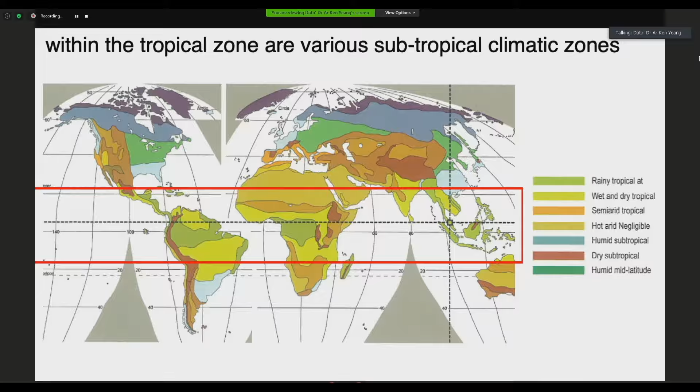Now the key design factors, these are some of them. There are many books written on this. The best are written by the Olgyay brothers, Victor and Aladar, in the early 60s, Baruch Givoni, and also in the mid 60s by Koenigsberger and people like that.

But these are some of the key factors. When you design in the tropics, you have to be very aware of the climatic data. You have to find out what is the acceptable level of comfort, because that varies from country to country and from culture to culture. Some people can tolerate a higher level of heat than others, while other people become very sensitive.

Then the orientation of the building is important, because if we look at the sun path, that determines the orientation of the building. What you want is to have minimum facades of your building facing the hot sides of the solar path.

And then the building configuration is important, the shape of the building. And then the solar insolation, how do you keep that away, the thermal control and glare. And then use of wind—the use of wind and natural ventilation can contribute towards reducing the use of energy.

And also the facade design. Of course, facade design includes aspects such as sun shading, the type of glass you use, and type of insulation. For instance, low-E glass is very effective, but expensive.

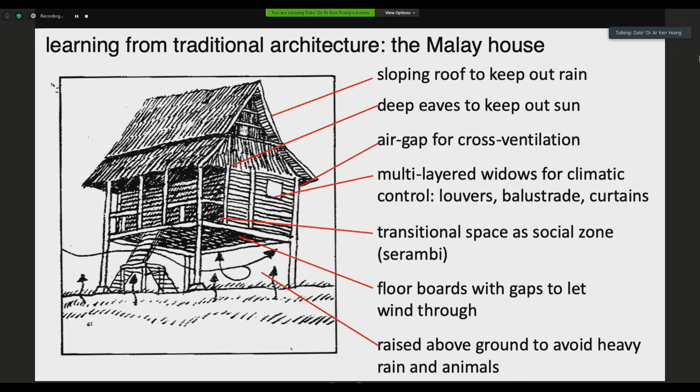So what we need to do is to study our traditional architecture, find out what is it in it that we can reinterpret in contemporary times. And this is why tradition and culture is very important, to go back and study it. This is just an example of analysis of the traditional Malay house, and there are other house types that we can analyze.

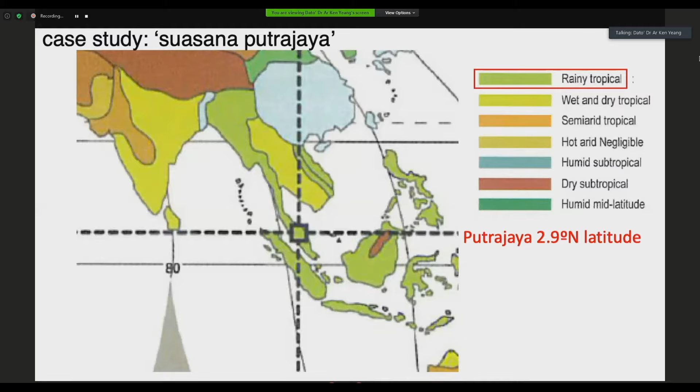Now, as a case study, I want to show a project that we designed in Putrajaya. It's called the Suasana Putrajaya. The first thing we do when we design, since we work all over the world, is to find out what latitude we're working in, because that gives an indication of the vegetation and the climate. So Putrajaya is about 2.9 degrees north of the equator, which indicates a tropical climate.

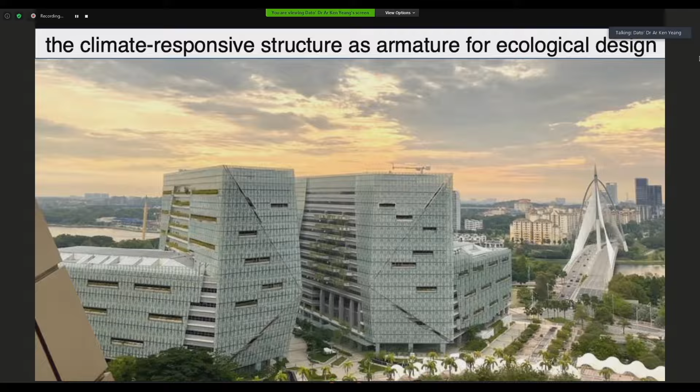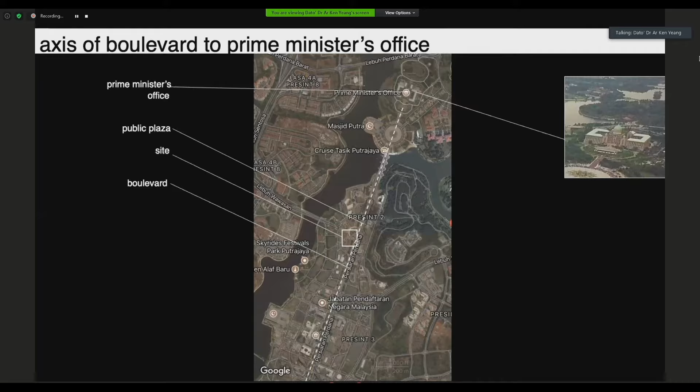Now, designing with climate gives us a climate-responsive structure, which is an ideal armature for ecological architecture. This is a project we finished about two years ago. It's by the bridge, along the boulevard, all the way to the Prime Minister's office. You can see the building there on the white square by the bridge, and then along the boulevard to the Prime Minister's office.

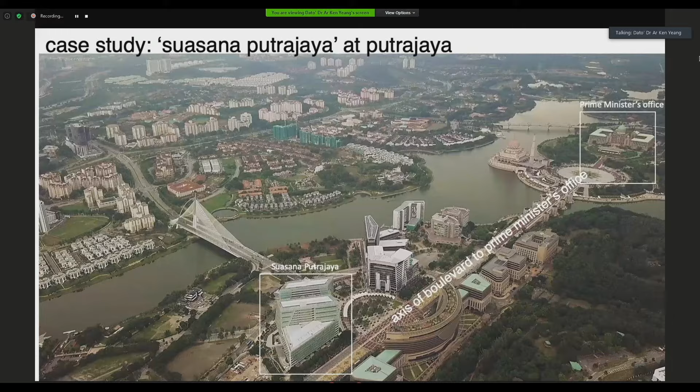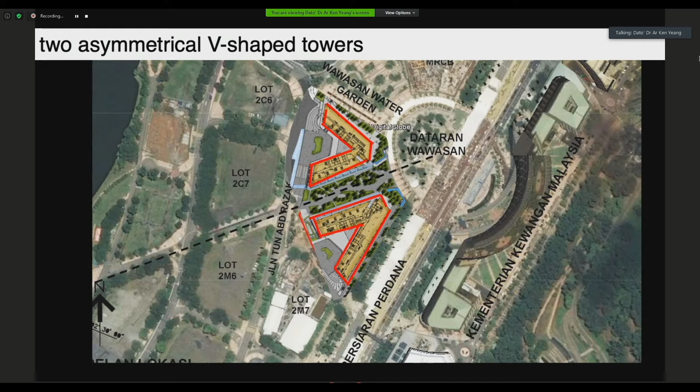It is two asymmetrical V-shaped towers, with the public realm in between, aligned with the Dataran Wawasan, and the axis goes all the way down to the Millennium Monument. This is the axis from the Dataran down to the Millennium Monument, which is also designed by us. And that's the bridge, with the Putrajaya offices on the right-hand side.

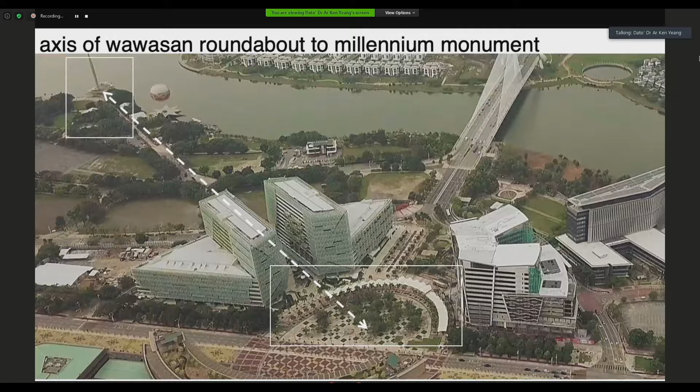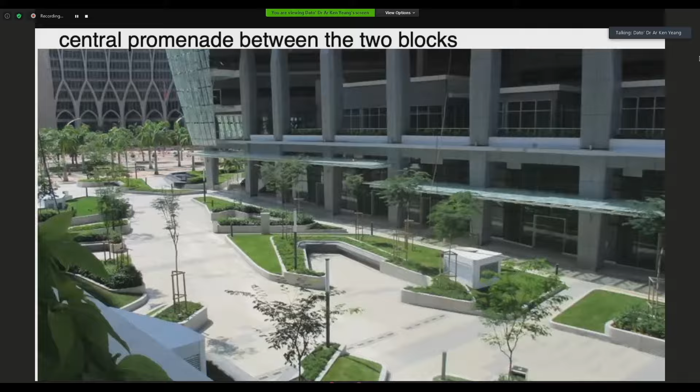The two V-shaped towers form the public realm, a place where people can sit, eat and drink. On the ground floor, facing this public realm, there are restaurants and cafes, so people can create a buzz around this locality. This axis shows the Dataran all the way down to the Millennium Monument at the end, which is right next to the Ministry of Finance and other buildings in that vicinity.

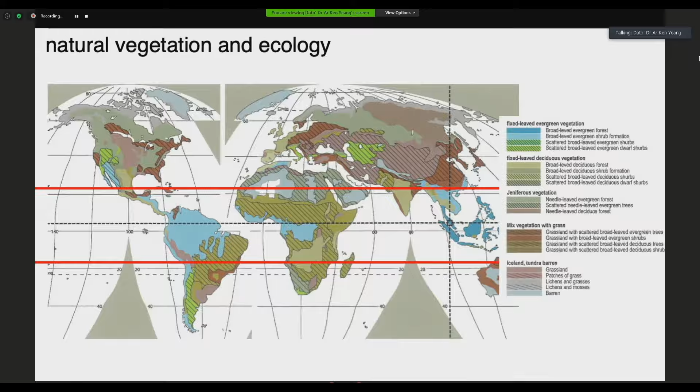Now, we've talked a lot about the climate and the tropics, but you cannot design for the tropics without looking at the ecology and natural vegetation. This is the different natural vegetation within the tropical zone, and this is clearly the biodiversity diagram for a certain species of butterflies. You find that near the equator is the highest level of biodiversity, so we have to be very careful when we design in this locality. The further up in latitude, we don't have to be as concerned, although there are some areas which are extremely biodiverse and sensitive. But particularly in the tropics, we have to be very, very vigilant about what we do on the land.

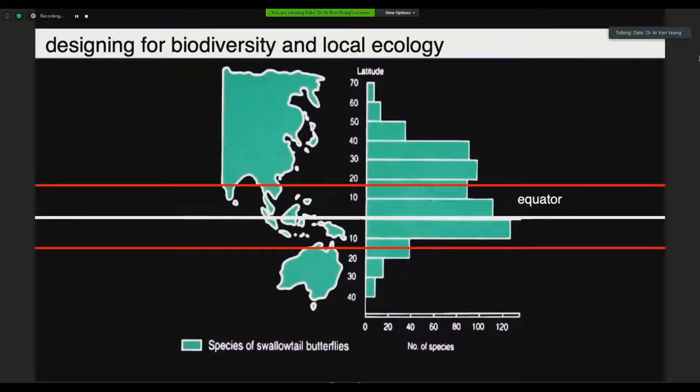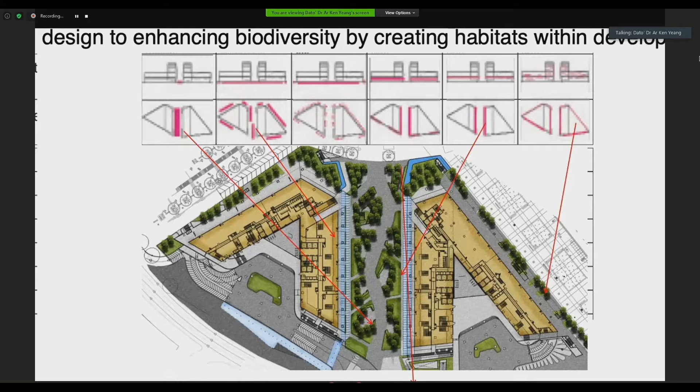Now, when we design, the first thing we do is create habitats within the development. This is a unique way of development - very few architects do this. A lot of architects put vegetation into buildings, but they don't know why they do it. Sometimes the vegetation they use is actually invasive species, which isn't good for the locality. What we try to do is create habitats on the ground, habitats in the air, habitats on the roof, habitats within the buildings - this is the first thing we do. And then we create what we call a biodiversity matrix, where we have the habitats on one axis.

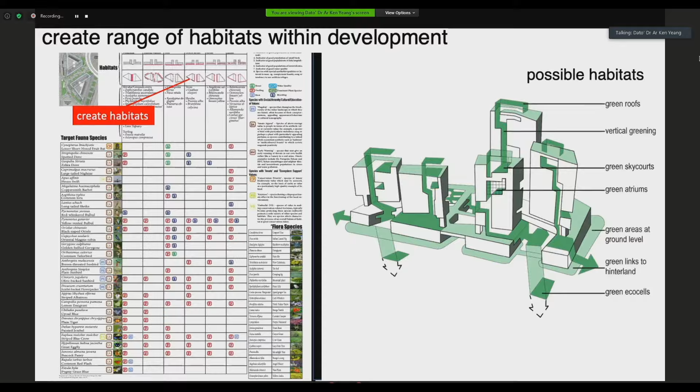On the other axis, we look at the species we want to bring back into the locality, which have been removed when they excavate the land, because by the time we got to the site, the land has been cleared. All we have is just the red soil. So we try to choose the species or habitats that will attract the fauna and flora we want to bring back into the site. I call this the biodiversity matrix approach.

From there, we choose the flora that will attract the fauna. We prepare the species, prepare the matrix, and see how they interact, how we can bring the fauna back for feeding, breeding, refuge from prey.

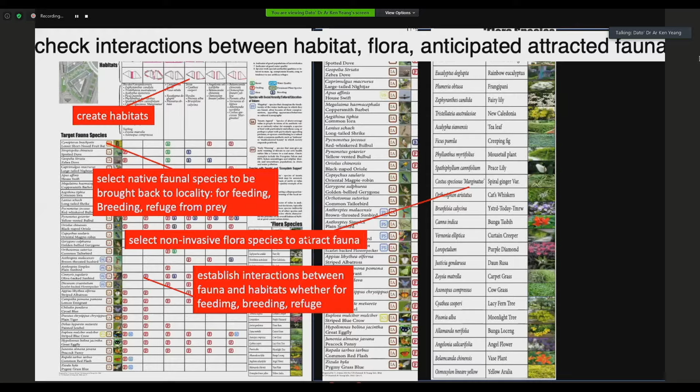Once we set this together, the next step is to design the landscape conditions within the site, so that the whole development becomes a total living system. We call this a biodiversity approach to design, a method we've developed to enhance the biodiversity of the location.

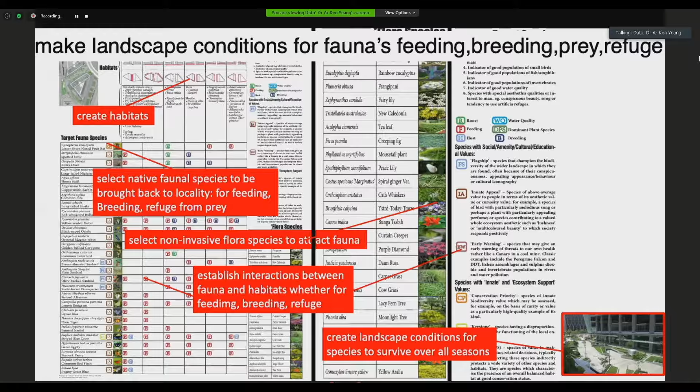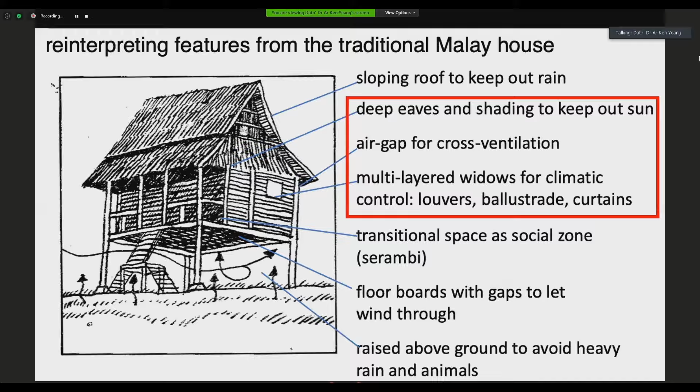Now, if you go back to the diagram I showed earlier, reinterpreting the features from a traditional Malay house: deep eaves and shading to keep out the sun, air gaps for cross ventilation, multi-layered windows for climatic control, louvers, balustrades. With this project, the traditional approach to keeping out the sun is horizontal louvers, but I thought there must be alternative ways besides using louvers.

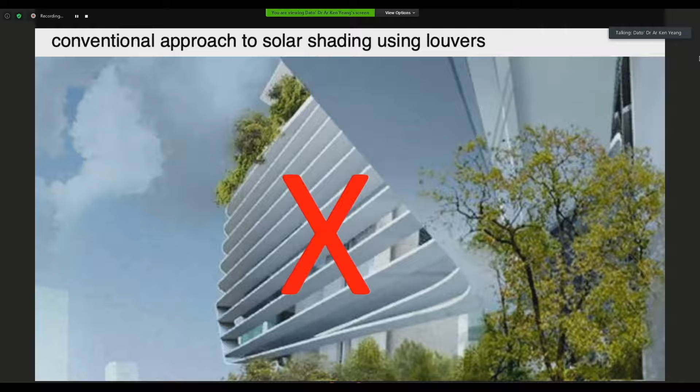So we thought maybe we should use fritted glass instead. With this project, we use glass fritted with a pattern on it. For cultural reasons, we took the Songket pattern, and with this pattern, 50% of the glass is fritted with white patterns to keep out the sun.

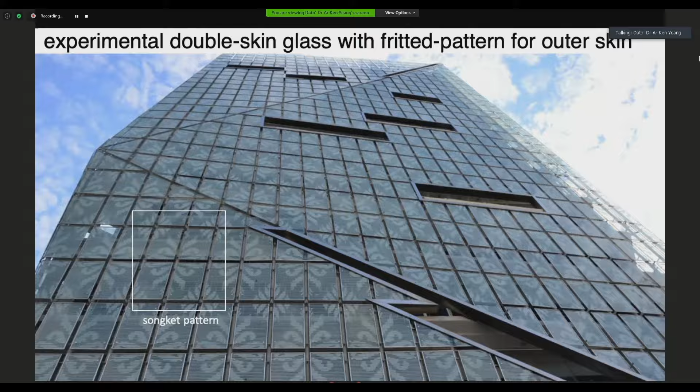Then I have air gaps between the glass panels so the wind can go through, and this is the outer skin. From there you have an air gap - you can see on the right-hand side it's like a walkway, with about a meter gap between the outer skin and inner skin.

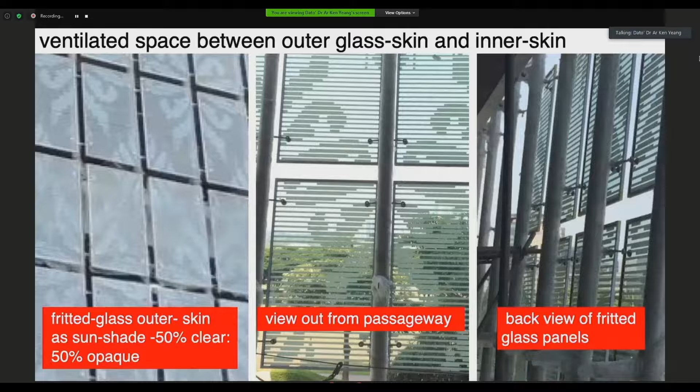On the left-hand side is the fritted glass outer skin, in which 50% is clear and 50% is opaque, and you can see the Songket pattern. The view out from the passageway from the inside shows the fritted glass pattern, and a walkway in the space between the inner skin and the outer skin.

We wanted to shape the building because this is an upmarket location, so we took the diamond as a metaphor for design, and the building's shape is faceted so that it looks like a jewel.

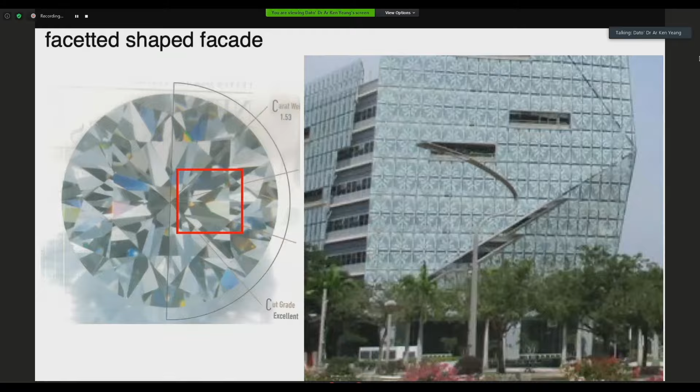Now we wanted to check how effective the fritted glass is. A typical office building, the baseline building in Malaysia, uses 210 kilowatt hours per square meter per annum. But by using the fritted glass, we got it down to 136.18 kilowatt hours per square meter per annum.

So the fritted glass actually works, and it's a novel way of keeping out the sun while giving the building its own shape and form, without affecting the regularity of the internal spaces. So this shows that it works.

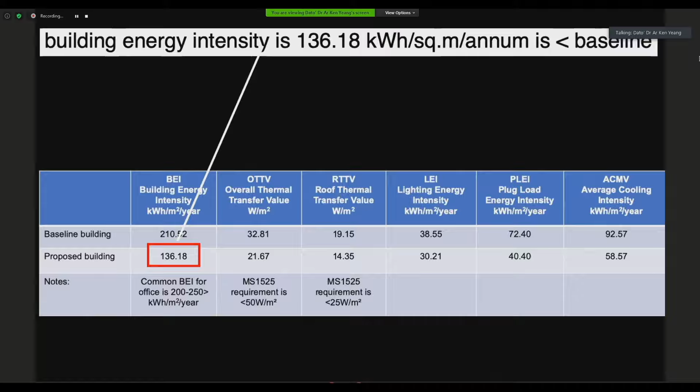Now, the solar path is very important. At the equator, especially in Putrajaya, which is about 2.9 to 3 degrees above the equator, the sun is almost east and west. The sun rises in the east, goes overhead, and sets in the west. A third of the day is in the east, a third is overhead, and a third is in the west. These are the areas where you need solar protection.

But compare this to the northern hemisphere, like Paris, which is 48 degrees north - the sun is very low, and on top of that they have seasons, so you have to let the sun in. It's a lot more complex to design in relation to climate in the temperate zone and cold zone than here in the tropics.

Obviously we only have more or less one consistent season throughout the year. But in Paris, London, or Europe, you have winter, spring, and autumn, and summer - two extreme seasons: a cold season like winter, a hot season like summer, and two very nice mid-seasons in spring and autumn.

But the approach to the facade is very different, because in cold climates you have to let the sun in during winter, because you want to get the warmth of the sun and as much sun as possible.

And the sun is very low. So the type of louvers you have has to allow for the sun to come in. But in the summer, you reverse it because it's hot. Then you have to keep out the sun. And so in the cold climate and temperate climate, you have facades which are operable.

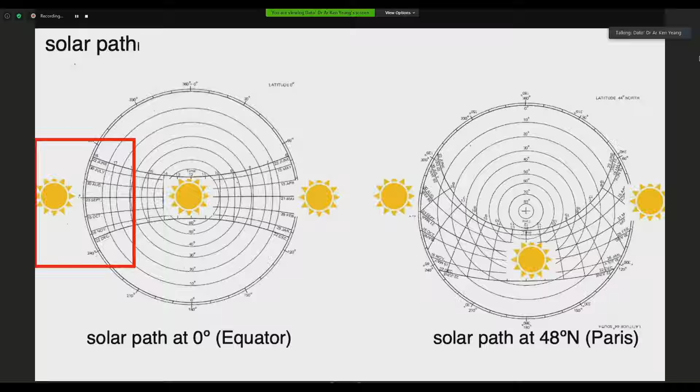And so for the western sun, for instance, for this particular project, we angled the glass. So you can see that the facade is changed on the western side. You can see in the red line on the left-hand side, western glass.

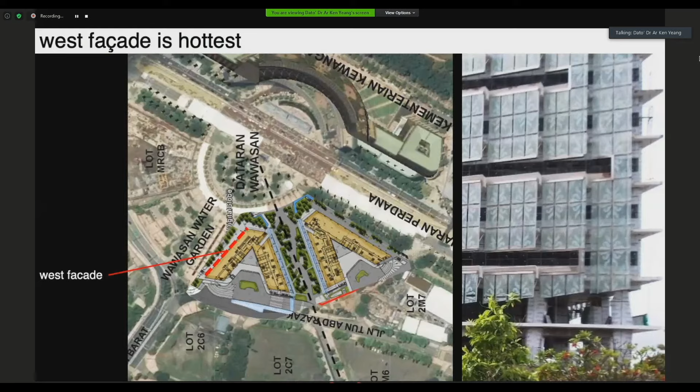And so this is the western facade, which is angled to keep out the sun from the insides of the building. And then these are different habitats that we have in the building.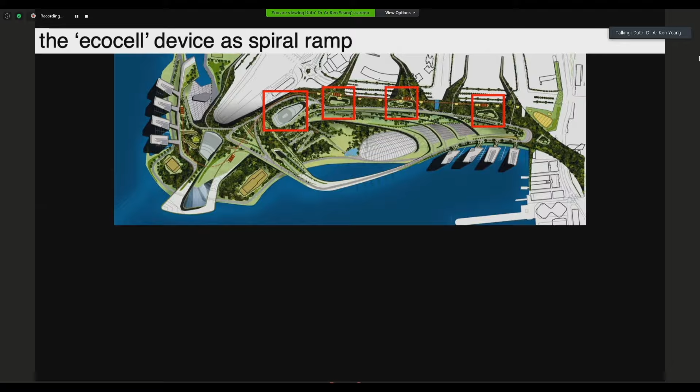And these are where the eco cells are. And this idea of the eco cell was developed when we worked on this project. It's basically a spiral ramp that brings the vegetation all the way down to the basement.

And so the eco cell does 5 things. It brings vertical integration of the vegetation, provides opportunity for rainwater harvesting to close the loop. It provides an opportunity for natural ventilation to the insides of the building.

It brings daylight into the insides of the building. And at the bottom is where we could have an ecological machine for treating the waste material, or we can have a biosphere. And so this is the eco cell device that we start to put into some of our buildings.

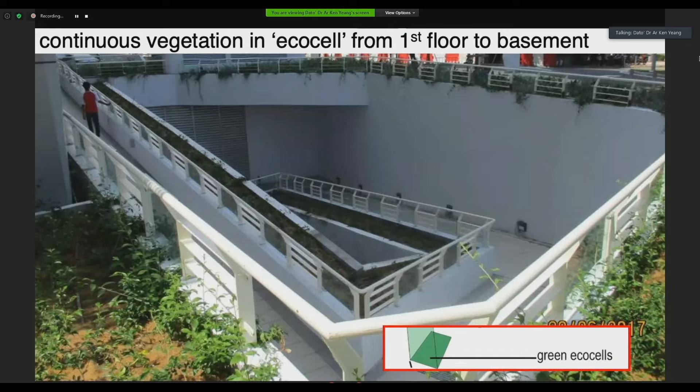And so for this building in Putrajaya, we have an eco cell, and this is the eco cell. The vegetation starts from the first floor, goes into this ramp, and you can see the planter on the left-hand side of the walkway that goes all the way down to the basement.

Now, it's easy to put habitats on a medium-rise and a low-rise building or low-rise development. So how do you create habitats in a high-rise built form? Because you don't have very much land area. The floor plate is small.

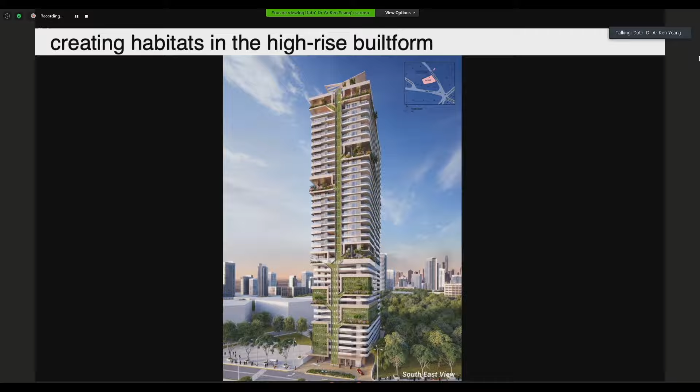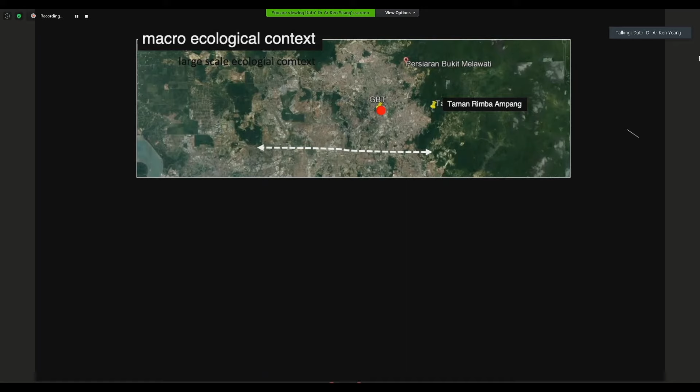And so what we do is that we create habitats on the facade of the building, and we stratify it. So that means we try and look into the ecology of the areas near the site. So the site's that red dot, and look at the species within this area, and look at the species near to our site. And from there, we try and prepare again a biodiversity matrix for this project.

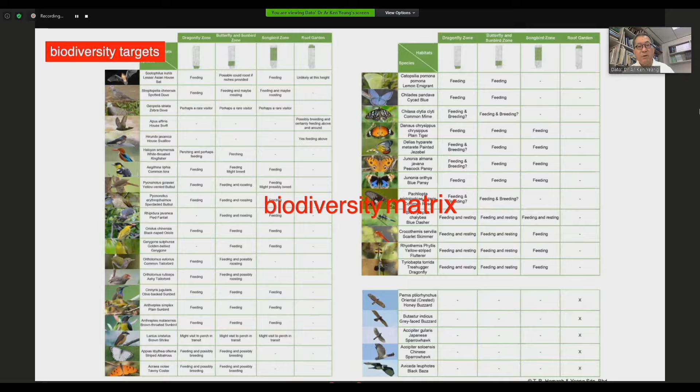The green areas are fairly close to each other, so like a stepping stone, the species can move from one to the other.

Because by doing this, you have a larger pool of resources in which a species can share. It enables species migration and movement within the vegetated areas.

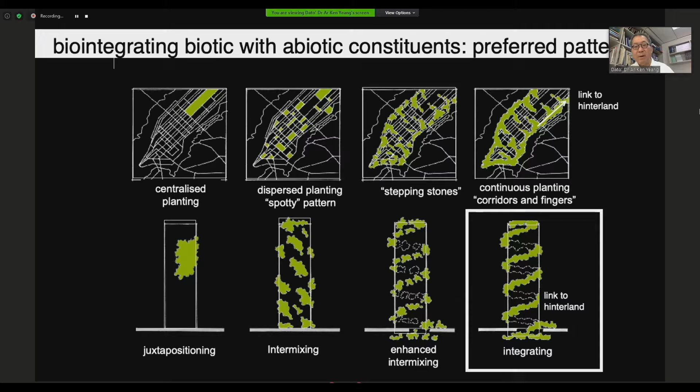And it also engenders a much more stable ecosystem habitat that can survive without human intervention. And so what we try to do then is to link the green areas in the ground.

Because what human beings do is that when we go to any land, we fragment it, we chop it up, like converting a cow into a burger.

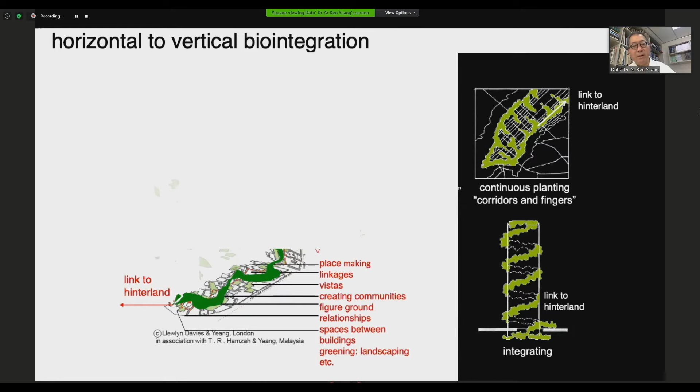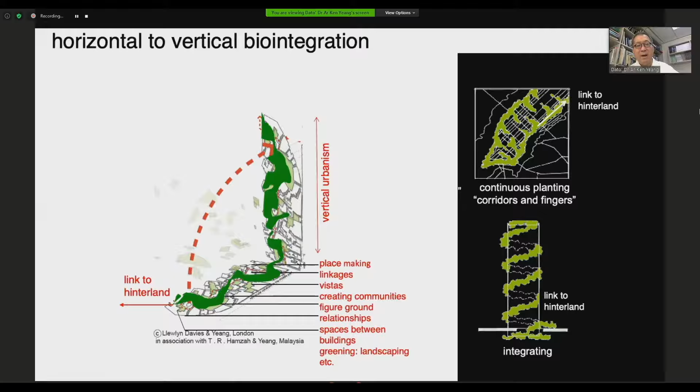And then we should try and link it. So if people ask me what we should do with cities, we should link all the green areas in the city so that we have greater connectivity and ecological nexus, but not just within the ground plane—we should try and connect it vertically as well. And so the whole city then becomes not just abiotic, not just inorganic, but linked as a continuous set—you should repair the fragmentation that human beings have done to the locality.

And so with this project, we stratified the habitats. We try to design the lower floors for dragonflies, choosing a species that will attract them. After that is the butterfly zone, attracting butterflies. In between, we have what you call the songbird zone. And the top one is for migratory birds. So this way we stratify the habitats vertically.

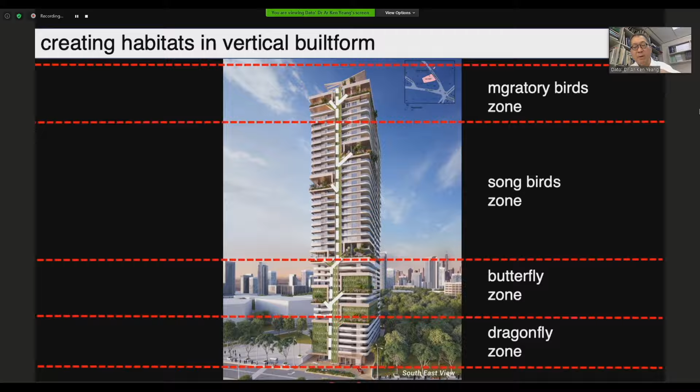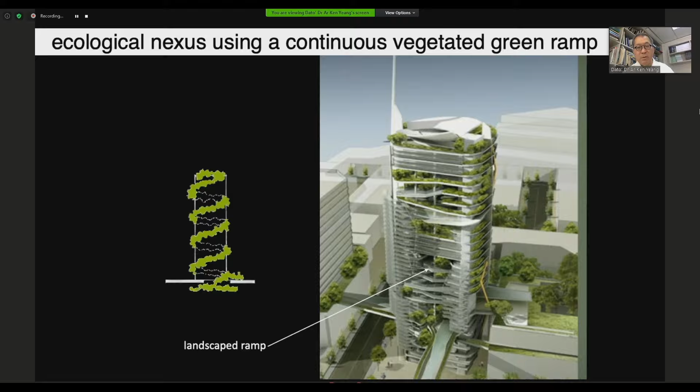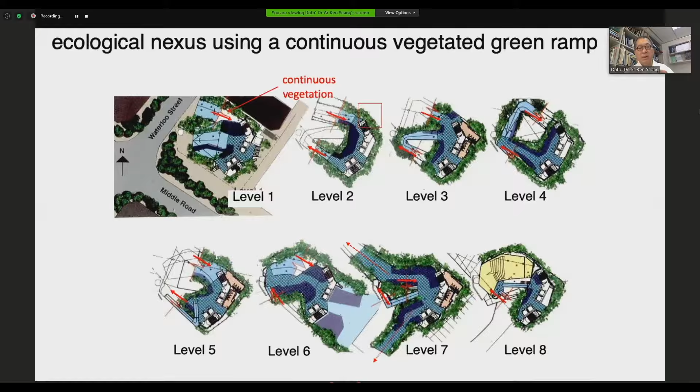With this project, which we designed in Singapore, the idea is to use continuous vegetation that goes all the way around the building as a vegetated ramp. So with this project, what we try to do is have a continuous ramp of vegetation that flows all the way up to the top of the building. And this way, as you can see in the diagram, you have continuous vegetation.

By doing this, you create a building which tries to balance the biotic with the abiotic constituents, to make it into a living system as much as possible. Of course, this is easier said than done, because half the time I'm fighting with clients, and clients say, 'Do you want to put veggies in your buildings? It's going to cost me a bit more money, I'm not getting any profit out of it.' So you have to tell clients that designing a green, sustainable building is not for commercial reasons—it's ethical, it's the right thing to do. So half the time I'm trying to persuade them to do it, and that's what we do all the time.

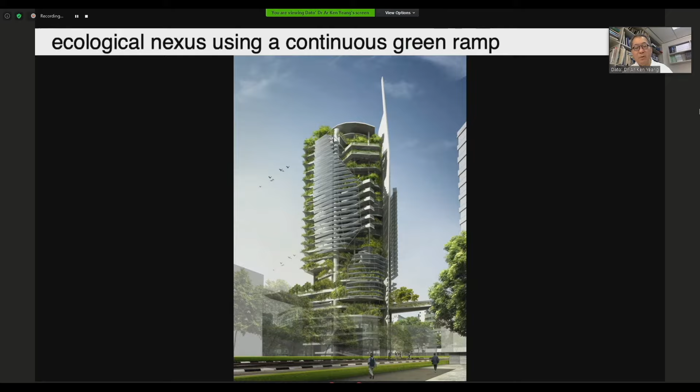But the whole idea of this building is that with continuous vegetation, whenever there is an adjoining building next to it, we could bridge across to the roofs of the next building. In this way we colonize the whole city. The whole city then becomes a vegetated city, a green city, covered with biotic constituents instead of just being inorganic, as most cities are at the moment.

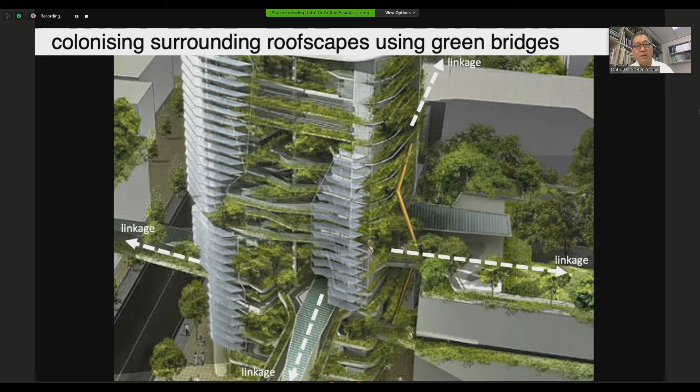Above this is the idea that in master plans you would have ecological corridors and ecological fingers that convert the city, balancing the abiotic, inorganic aspects of the city, and making it much more like an ecosystem. By bringing vegetation into the city, the more we put in, the more ecosystem services we bring back into the locality, which is good for the environment.

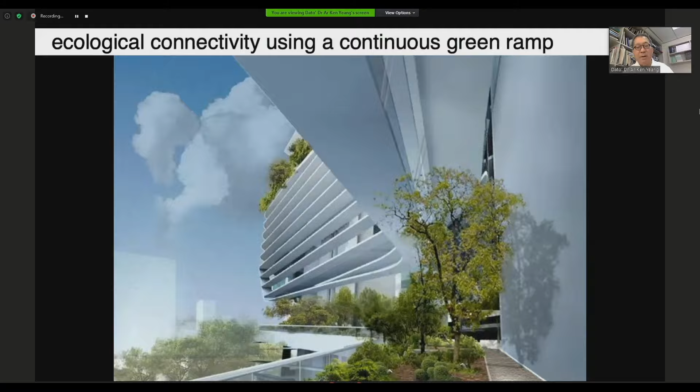And so this is the building where we had louvers on the outside, and you can see the vegetation in a spiraling ramp going all the way up. What we've done is put a walkway next to it, so people can service the plants without going through the interior office spaces of the building. Here it is being used—you can see the sun shading on top, the plants, and people actually using it.

Then we said, well, we might as well make this into a park, so we call this a linear park, where with every facade we climb one floor. Here it shows how it climbs. Here's the building in this context, and you can see the ramp vegetation going all the way up the facade.

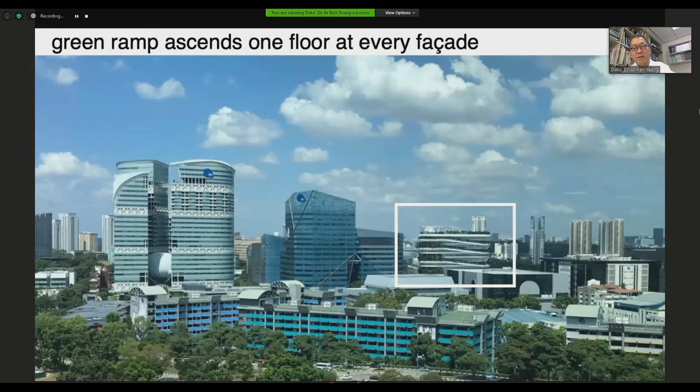With each floor, we cover one facade. You can see here a close-up of the ramp, the walkway, the vegetation, and the facade on the left-hand side—you can see the sun shading. And of course, the plants help cool the building.

It gives out a certain amount of oxygen, which creates a lower microclimate, making it cooler, and that's also a healthy environment for the locality. So the vegetation starts on the ground and climbs up the building right to the top.

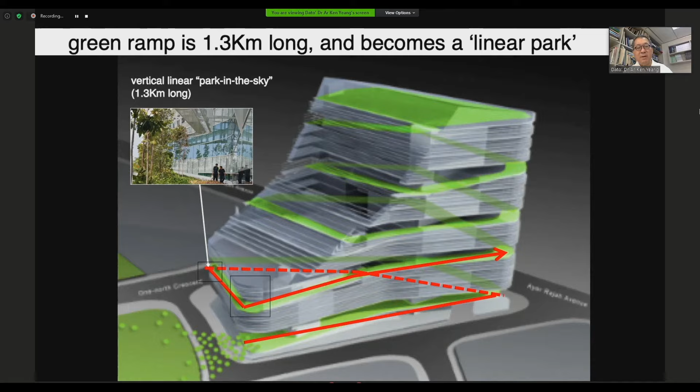If you stretch this vegetated ramp out, it's about 1.3 kilometers long. The green vegetation put in is 12 times more than what is required for certification for the Green Mark. So you can see we try to bring as much green as possible into the building for this project.

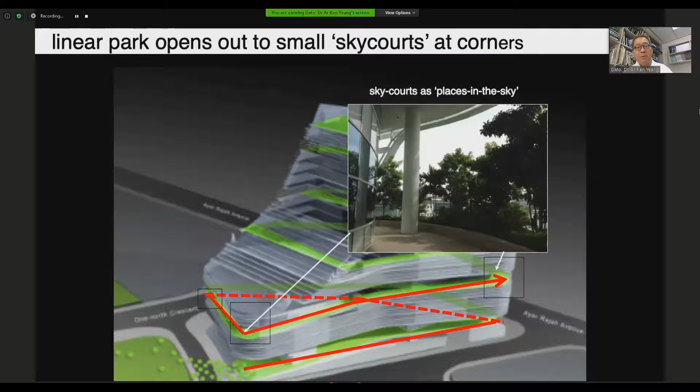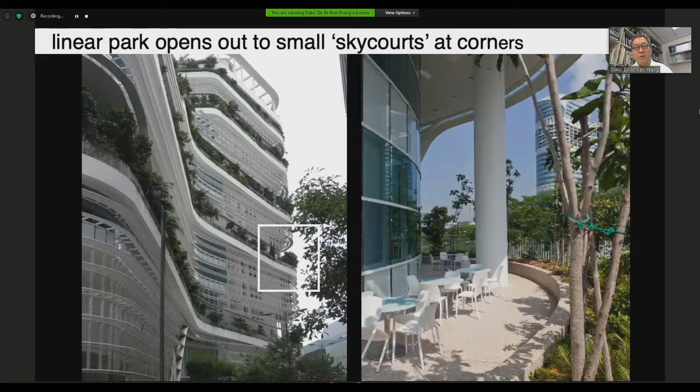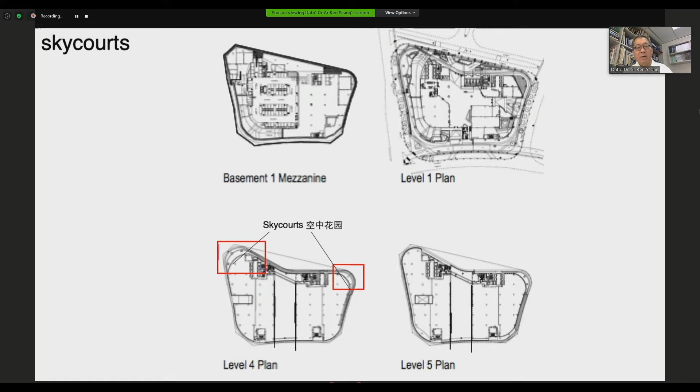Now, it's deadly boring if it's just a ramp going up. So whenever the ramp hits a corner, it opens out into what we call a sky court. These are places where it punctuates the ramp, spaces where people can go out, have a meal, have a cup of coffee, or smoke a cigarette if they wanted to. So these are the sky courts.

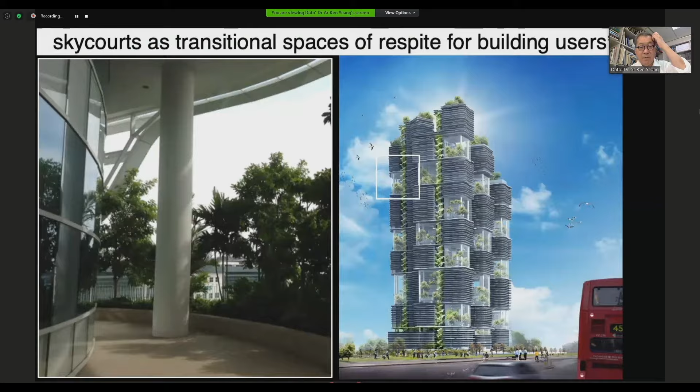On the right-hand side is the project we're working on in London, where we have sky courts staggered all the way up to the top of the building. On the left-hand side is a photograph of one of the sky courts in this project, and here's a bigger one at the corner. This is the view from the side.

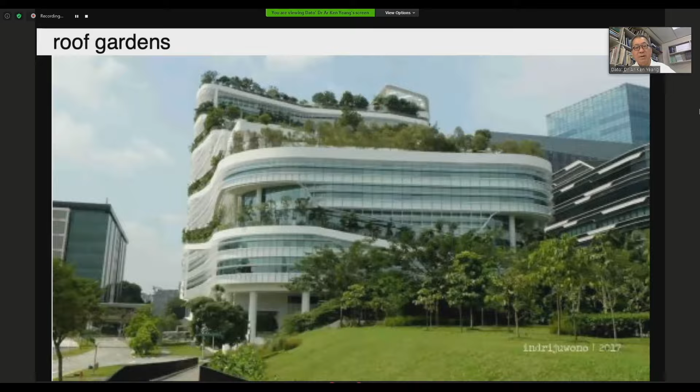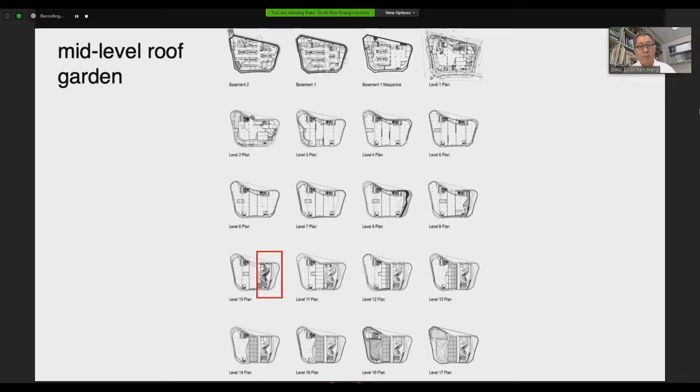More than just the sky courts, halfway up the building I have a roof garden. You can see the roof garden, the steps all the way up, and another roof garden at the final top floor. You can see in this plan the series of roof gardens.

The building was finished about 8 years ago. This is the mid-level roof garden, and this is the uppermost roof garden at the top of the building.

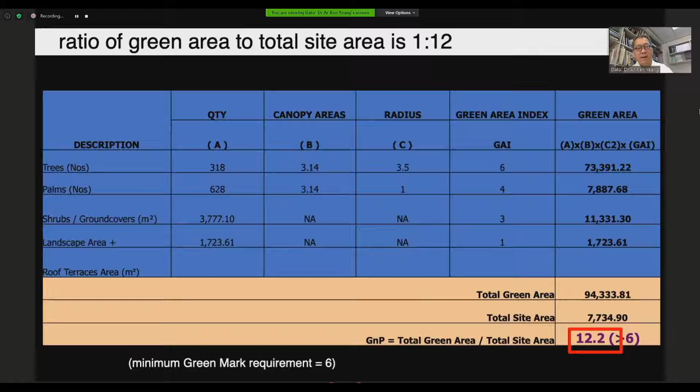The requirement in Singapore to get the certification, called the green mark, is at least 6 points for this greening area. For this project we got 12.2, twice what is required. The certification system, whether green mark, LEED, or GBI in Malaysia, is only a guide. It doesn't mean we fulfill it and that's it - we have to double it, exceed as much as we can, which is better for the environment.

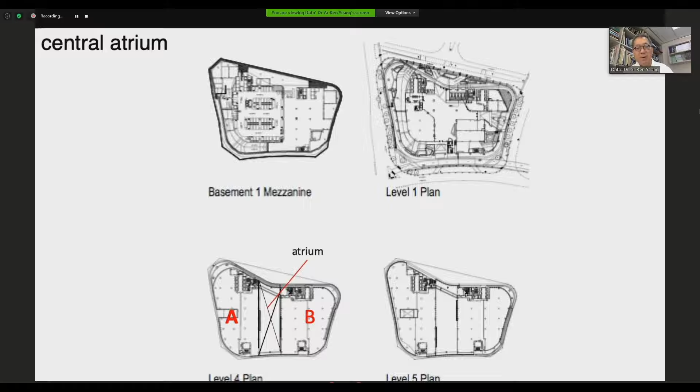Now, if you look at the building, it looks like one building, but actually it's just two blocks wrapped by a wrap facade. In between the two blocks is an atrium, and the atrium opens up to the sky. You can see operable glass louvers on top, but these louvers are open most of the daytime so the space in this atrium is not air conditioned.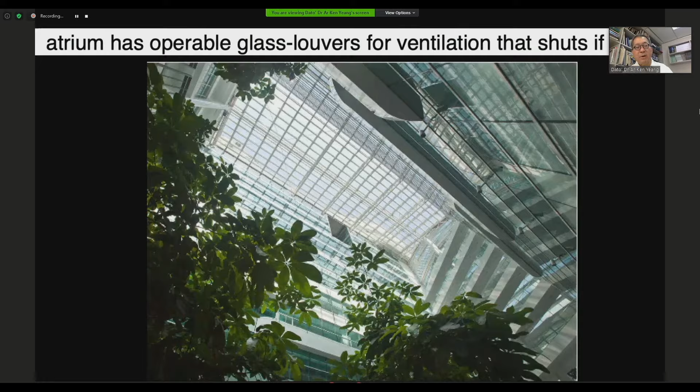Just some cold air blows in, so there's some air going into this space, but it's not fully air conditioned. It's what I call a mixed mode space - the glass louvers are open most of the time, but if it rains, they automatically close, just like this. So in this way I have an operable system for the building.

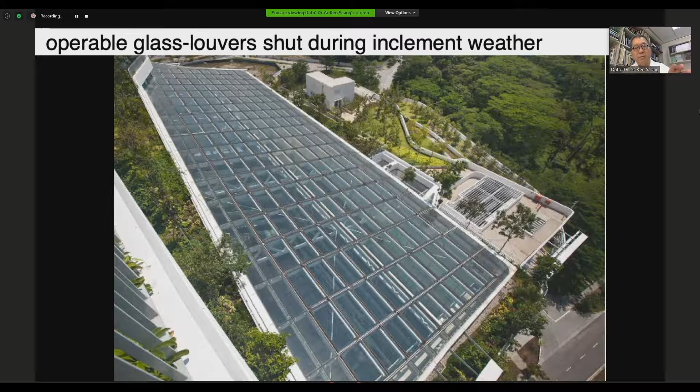On the right-hand side of the glass roof is the mid-level garden, and then the roof gardens above. Between the two blocks I have a bridge that links the two blocks together. You can see the bridge there.

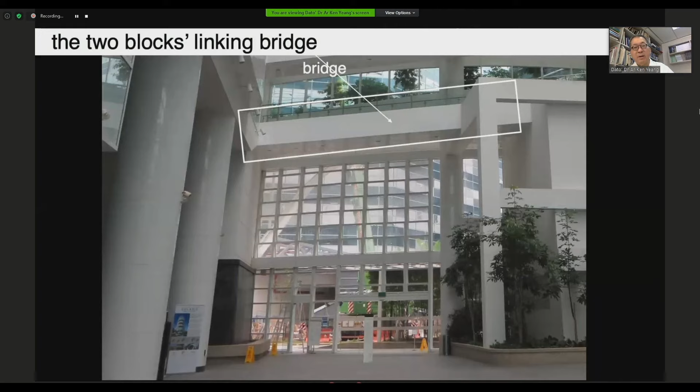We also used this project as an opportunity to experiment. Most light shafts, most air wells that link buildings, are vertical. But for this particular project we said, why don't we have a diagonal light shaft? This way we bring light all the way down into the insides of the building, so that when people walk past on the street and look up, they can see the insides of the building.

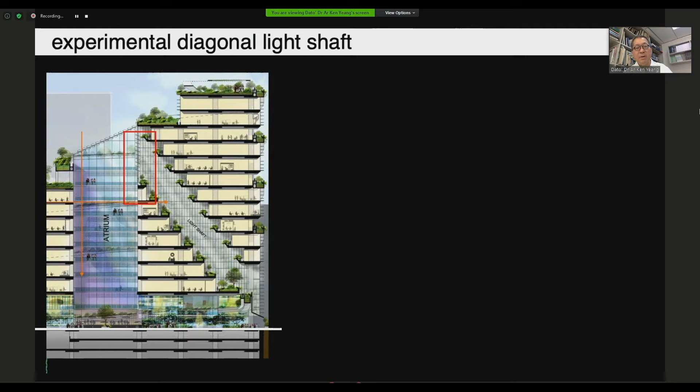So this was an idea we had. We call this a diagonal light shaft, and it's just a small square, not a huge light shaft. It cuts at the diagonal going all the way down, and on top it has a big opening which opens out into the atrium.

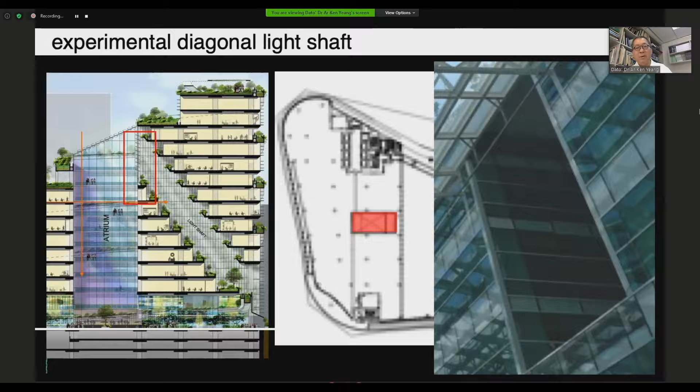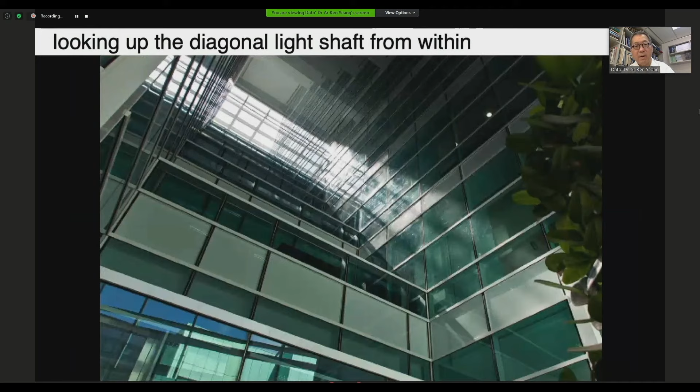This is the view from the street, looking up the light shaft. You can see all the terraces along the light shaft, and on top of that the operable glass roof. This is another view looking up from the bottom, and this is the view looking down.

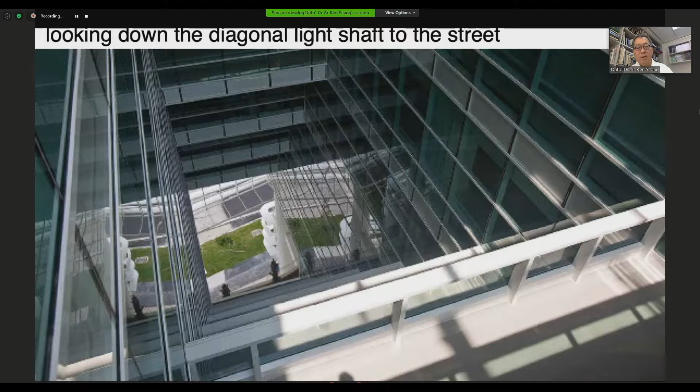So people from the offices can actually see the street from this level, and from the street you can look up and see the insides of the atrium.

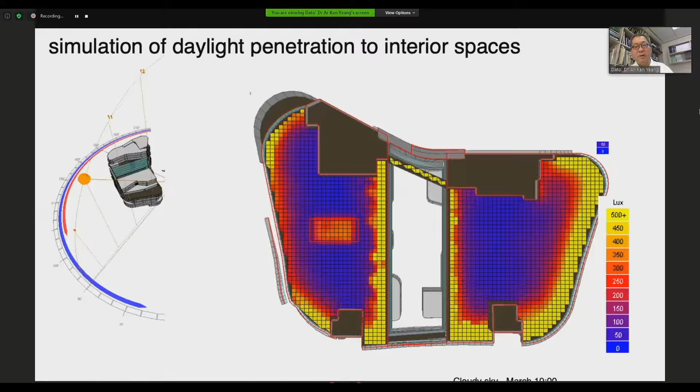This shows that I got as much glass heat and as much light as I can into the building. The diagonal light shaft works to some extent, but it is still actually very dark inside the building. So this is where the light shaft is.

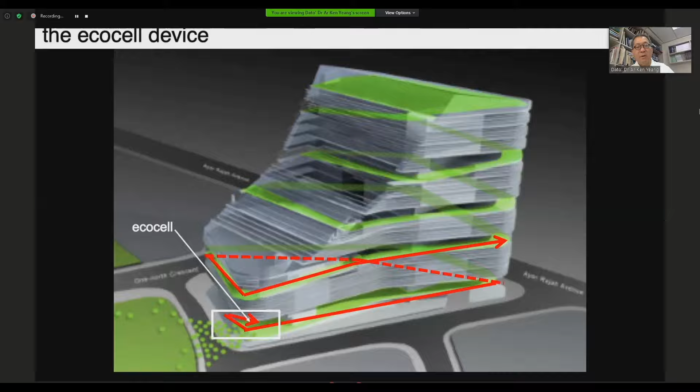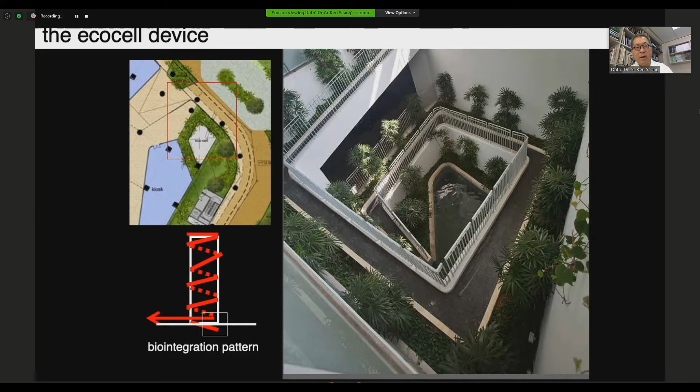The vegetation goes all the way down to the ground floor and down to the basement. I call this an eco cell, and this is where it's located on the ground floor plan. The eco cell brings vegetation, daylight, and rainwater, and it goes around the basement, where I have a tank which collects the harvested rainwater.

So now I'm going to end in a minute.

Ecological design is basically a biointegration of four factors: nature, human society, technology, and water. With nature, we have to understand that there are ecosystems we need to preserve, we need to be sensitive, and there are species we need to relate to and protect.

Human society is not just community, but our entire system—social, economic, political, educational, institutional—all have to change if we are to have a sustainable future. Now, that's a tall order. I can't do this in my lifetime. I don't even have the ability to do it.

But people have to recognize that our economies have to change, we have to change our lifestyles. We cannot have a way of life where we want more and more different things. We cannot have a diet where we eat meat all the time; we should get our proteins another way. Our education system means we have to teach ecology and natural history to children from a young age, so they understand that everything they do has an impact on the environment—even just flipping a switch at home.

Economics have to change—we need a circular economy. Our businesses have to change, because industries have to stop being throughput, meaning you take something, use energy, use it, and then throw it away when finished. We need to close the cycle and have a cyclic system of economy and way of life.

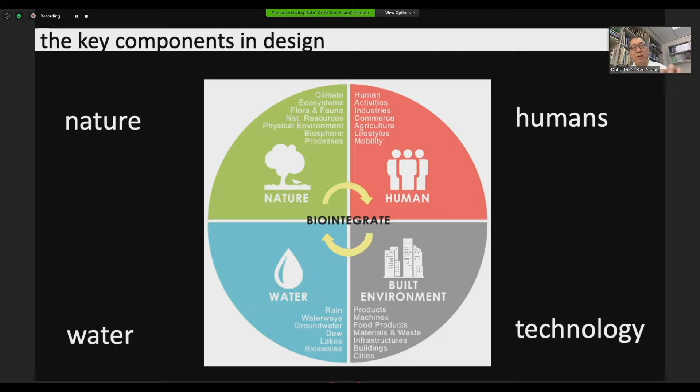In our built environment, we should try to reuse water. We should treat it and use it, if not for potable purposes, then for cleaning, for other purposes, for irrigation. These are the key factors in designing an ecological architecture. You have to integrate nature, humans, technology, and water together. These are different factors we have to take into consideration.

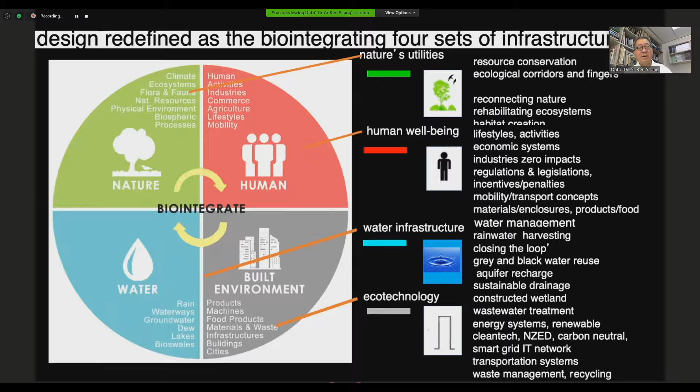I'll expand on it a little. This is the diagram that drives our work. We look at these four factors in every project and see how we can integrate them as much as we can. But of course, this is easier said than done. It's a very difficult task, and to be frank with you, it's a miserable life being an architect.

This is what I've been asked to talk about: advances in tropical architecture. Tropical architecture is designed with climate, and the Olgyay brothers called it bioclimatic architecture. But we have to move from bioclimatic architecture to ecological architecture, because even though we start from bioclimatic architecture, which becomes an armature for ecological architecture, we have to advance. We have to move from just designing with climate to designing with nature. And so that's the end of my talk.